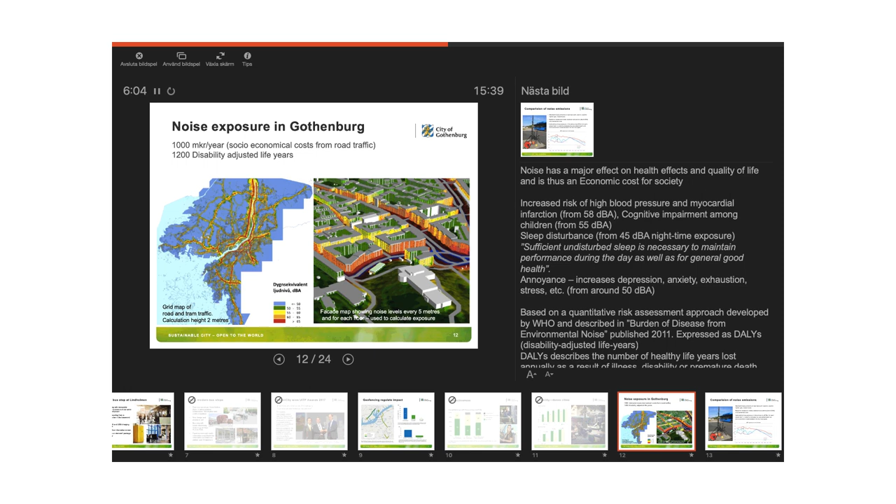So we did a comparison between gas buses, diesel buses, and electric buses. We measured on a test track, and we put it in our models. You can see that in the decibel C spectrum there is a very big difference, especially in the low frequency band, up to 25 decibels. So of course, what you can hear, it's more or less completely quiet when the electric bus runs past, and very noisy when the diesel bus comes past.

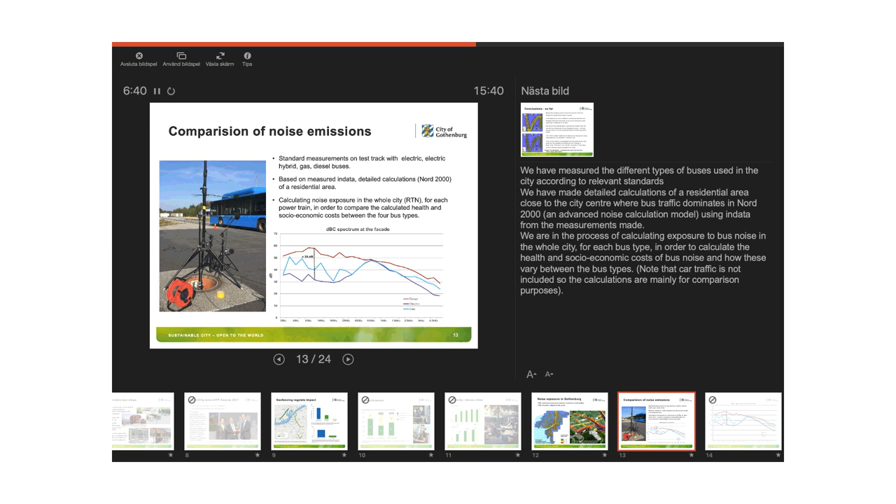So we checked it, we put this data into our models, and unfortunately we found out that we didn't see any real advantages when it came to electric buses. One cause of this is that the models use decibel A, I think, and high and low frequencies are damped out in decibel A. The other is that it is medelvärde, average adjusted. So a lot of cars just outweigh a few buses on these roads.

But when we put in the actual figures, we notice a very big difference in the facade noise levels. Another thing with low frequency noise is that it's very difficult to damp. You need very long distances or very thick walls to do it. So going to electric buses is a very easy way for the city to lower the inside noise in apartments around where there are buses or other heavy traffic.

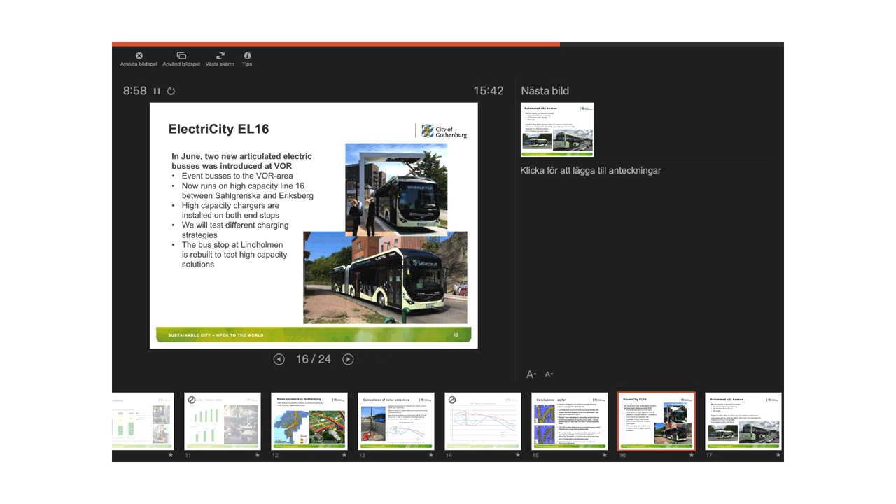Yeah, we have automated city buses. I think Volvo will talk more about these later on. But this is also a part that the city sees as very important to increase the capacity of the public transport system in cities, and also the comfort for the passengers.

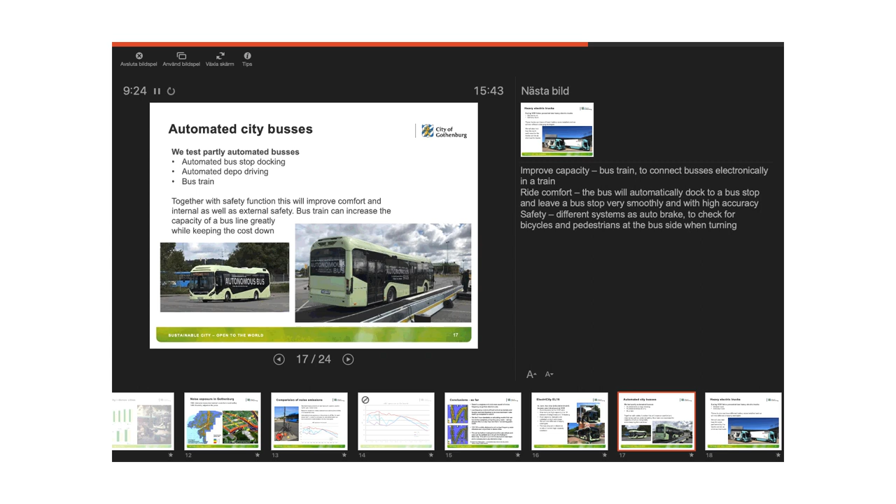Another part that we're looking at in electrification is now heavy trucks. It has the same advantages in the city as electric buses, with a much lower noise. So we have 2 electric trucks, 1 delivery truck and 1 refuse truck. They also have different battery sizes installed. The delivery truck will probably need to charge during the day, but the refuse truck shall have enough power to run all through the day.

The other thing, of course, when it comes to trucks, is that for the work carried out in the city, emptying and loading, it's very important that it also becomes quite quiet. And this has become a success factor in Gothenburg.

Today we have several projects where we will change the public transport system in Gothenburg to electric buses. The first one will come in September next year, where we swap 30 buses to electric around a hub. And this is done within the present procurement, so it's a little bit special. And then we have a number of new procurements in Gothenburg for several hundred buses that we certainly hope will also be electric.

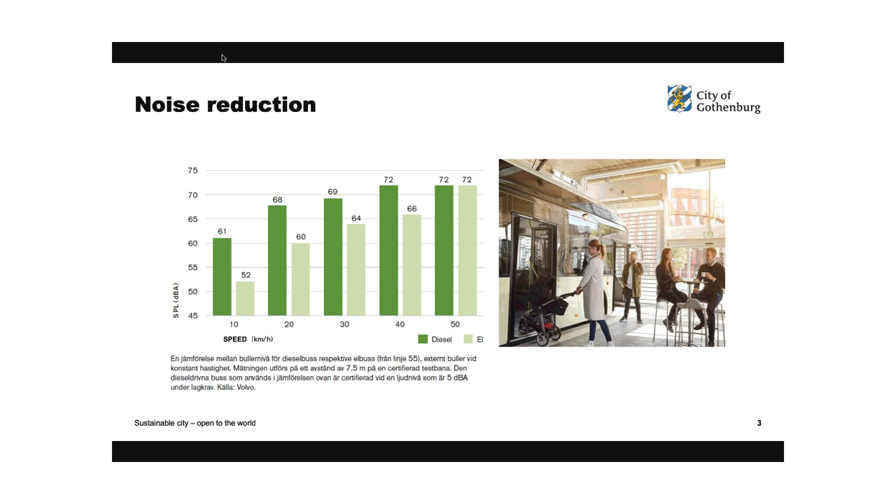When calculating traffic noise for a detailed development plan, the plan must be drawn up for the noisiest situation, of course. Consideration should be given to future traffic volumes, looking long-term into the future, of course. This is expensive stuff, so it needs to be done in a proper way. The number of vehicles and the proportion of heavy traffic are used in the calculation, but consideration may not be given to how the buses and lorries are run, because that cannot be controlled by the detailed development plan.

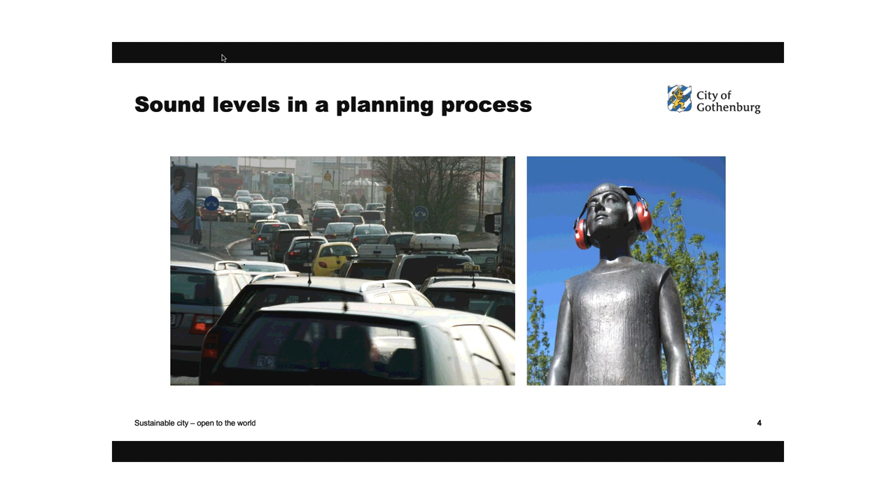Volvo's first electrical refuse lorry is now being put into service by Gothenburg City Refuse Collection Company, and other electric heavy vehicles are also being developed. Gothenburg City has backed a partnership agreement with Västtrafik, that's the head of the public transportation authority, ahead of the procurement of new city buses that will come into service in 2020 to 2023. The aim is to gradually move to electrical buses in the city, but until the procurement is finished, we don't know the pace of the technological shift.

The areas we plan today will not be built until after we are probably well on the way in the transition to electrified heavy transport. But the noise calculations will be made for diesel and gas vehicles before we are sure that the technical shift will take place. The calculations also do not take into consideration that most of the gains will come from the low frequency noise.

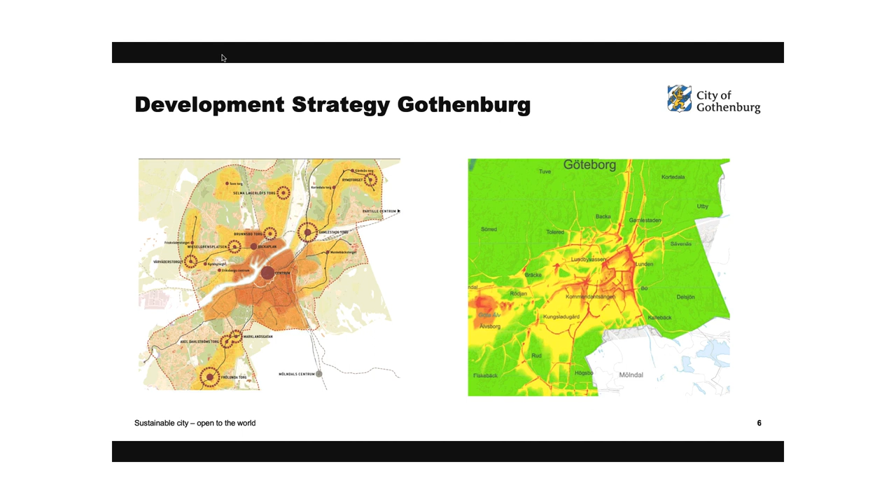In 2020, the municipalities in Sweden will be able to use a new environmental zone where only electric vehicles, fuel cell vehicles, and plug-in hybrids and gas vehicles that meet Euro 6 are permitted. Such an environmental zone and procuring public transport with electric buses could mean that we could calculate the noise and air quality with electrified vehicles, but we are not there today.

For decades, Gothenburg has been a city where much of the land is used for cars. The buildings have ended up as islands between traffic routes and parking places. When shifting from private cars to public transport, less space will be needed per traveler. In central locations where many pass, a high capacity of public transport is required, which means that bus and tram stops are separated. That takes up a large amount of street space.

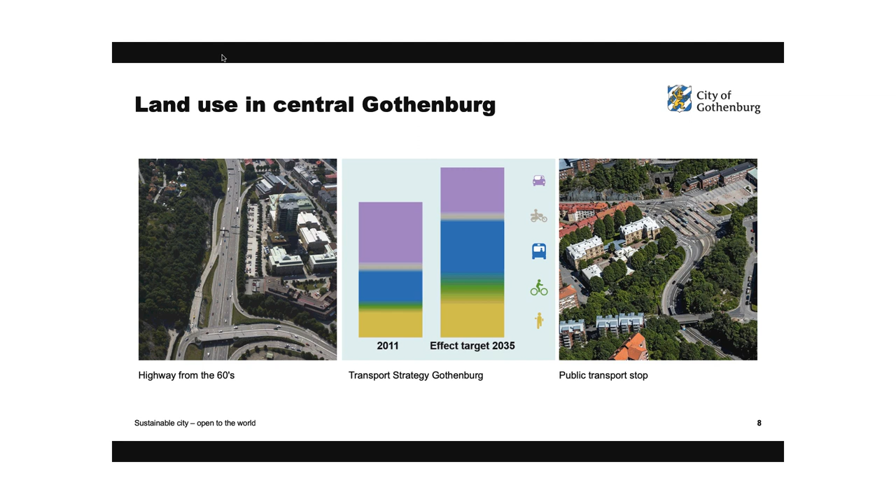We get streets that swell and push the building away at the bus and tram stops. Conflicts can arise between the need for land for stops and for buildings. Electric buses have been tested at indoor stops. If electric buses are implemented in full, it may be possible in some strategic locations to have only indoor stops for buses.

The buildings could then go as far out to the street at the stops as they do along the straight stretches of the streets. Lindholmen Science Park and the municipal company Älvstranden have had an idea study conducted on how indoor stops could be designed.

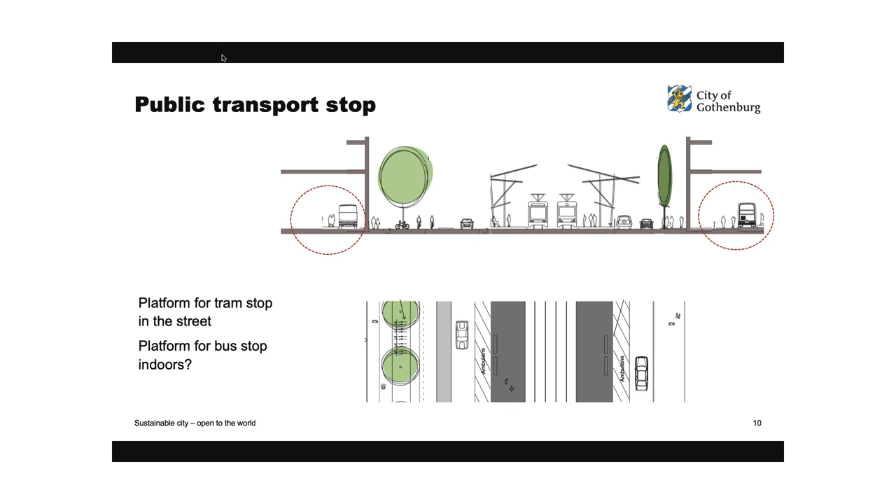Actually, inside, in the middle of the building, like a train station from the 19th century, or as a display window. Many things remain to be solved if a bus stop moves in from its space on the street to the ground floor of a building. For example, how to cross pedestrians and cycleways, but we could build a denser city with such stops once we have gone over to electric buses. And, of course, all the other systems of the future bus coming along with this.

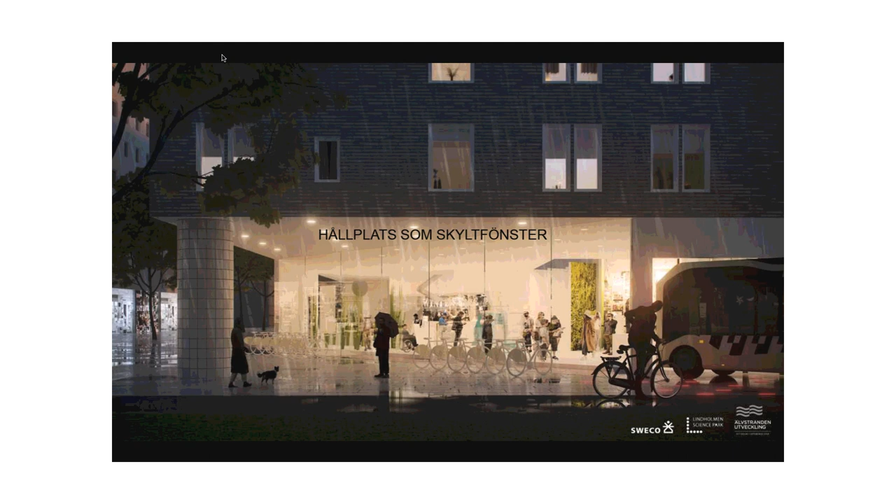So, to summarize, the noise and air quality in central Gothenburg are greatly affected by the heavy traffic. When, perhaps in 5 to 10 years, we can include electrified vehicles in the calculations performed in the work on detailed development plans, it will be possible to motivate dwellings and workplaces in many more places than we actually can do today. And this is very, very important. We can build a tighter city.

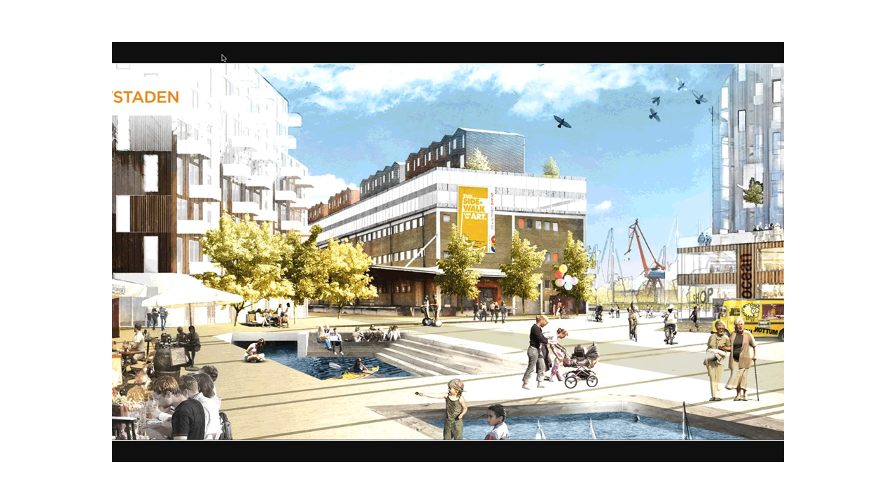We will also be able to build more densely in some important destinations in the city if electric buses enable stops to be moved inside buildings, into buildings, rather than taking place on the street. That is when city planning can really benefit from electrified vehicles. And then just some concept ideas of how this could look.

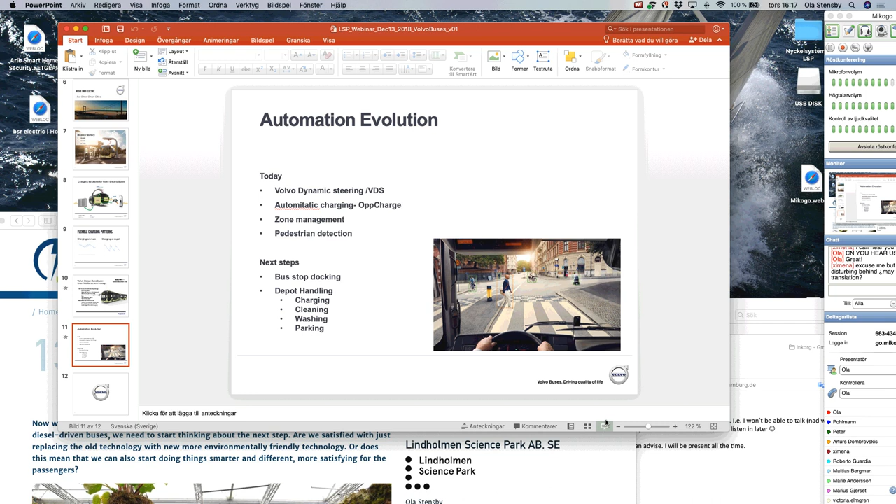So thank you, and that gives you a view on the benefits with autonomous buses, and in the next steps you could see what we see as the evolutionary steps in automatic driving. We saw bus stop docking, a feature that has the benefit of making the docking more efficient. Another feature which was not mentioned is that this is one of the most damaging operations for buses. The rims and the wheels are often damaged by this process. So you can actually save money on this one from a maintenance perspective. So that's another aspect of this.

Then the next step is what we call depot handling. It could be automated charging. It could be automated, at least running to the cleaning. We can have a robot vacuum cleaner, but that's not it. I mean, it's more handling going to cleaning. Washing could in principle be totally automatic, and of course the parking. And the reason why we see this as the next evolutionary step is that this is a confined area. Here we can control the environment. So we see the most obvious business case inside the depot. So the evolution will be in that one.

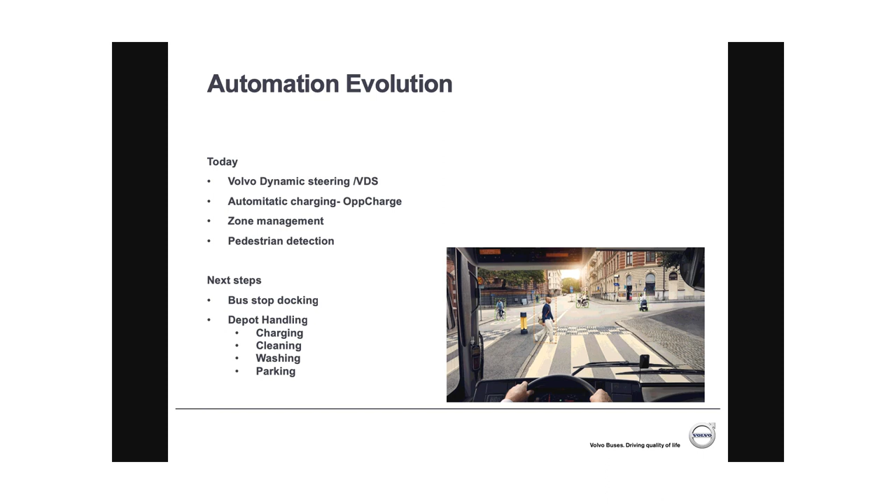Then on top of this, I can also tell you that we have one project. The buses that you could see in the movie will run in Singapore, in a campus area, the NTU campus. They will start operating sometime next year. There will be a driver inside as well, just for security reasons. So that will be our first traffic test. But I would call that a pure research project. It's not an operational project, not fully commercial. It's really research to see how our buses can behave in mixed traffic.

Mixed traffic is a challenge as far as we can see it. Not only mixed traffic with pedestrians and bikes and cars, but also mixed traffic with non-autonomous vehicles. I think that is one of the big challenges from our perspective. But we are in this game. We see that it has huge impacts on the overall operation of public transport. And as you could see here, the combination of electric buses and autonomous buses gives us really powerful tools to do very nice city development. And with that, I will end my presentation. Over to you, Ola. Thank you very much.